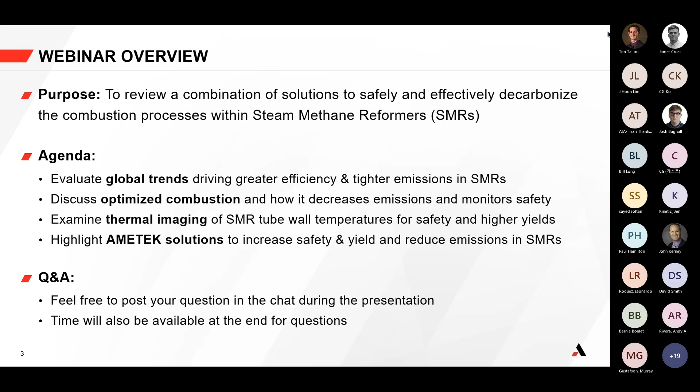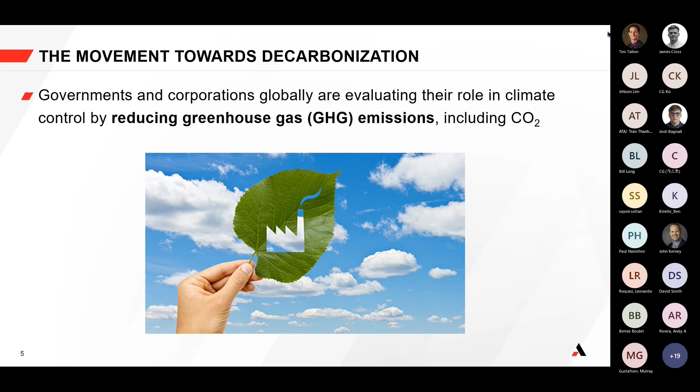So now just to get started, we'll talk about global trends. And I think the biggest thing about decarbonization is that there's a driving need in recognizing a need for climate control. So how can both governments and corporations do their part to reduce greenhouse gas emissions, reduce global warming, and in the process, how do we think about reducing carbon dioxide emissions? Now, many industries will continue to require the combustion process, because of its high energy density for power and for heat.

There are a number of industries, including steel, cement, and chemicals, that are relatively hard to decarbonize, as well as mobility solutions like ships, airplanes, air traffic, and automotive that will continue to require combustion for their high temperatures and high density per energy content.

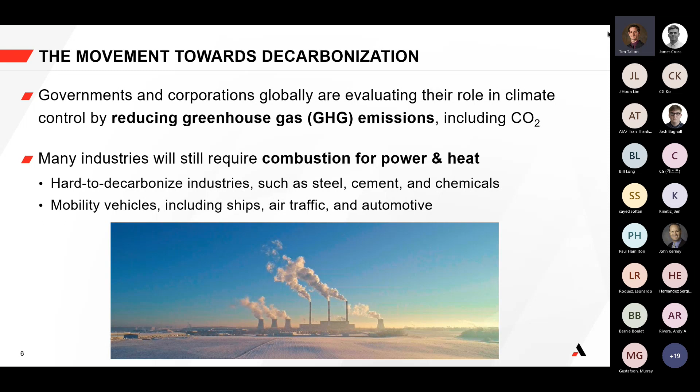So as we look to large scale decarbonization across the variety of combustion mechanisms and processes out there, some that come to mind are carbon capture to directly remove CO2 emissions from combustion, both before and after the process. There's also electrification to generate heat in place of combustion, and using high hydrogen fuels or hydrogen as a fuel to generate heat without creating any CO2 emissions. That said, combustion remains important in our movement towards decarbonization, and that's partly why we're here to talk.

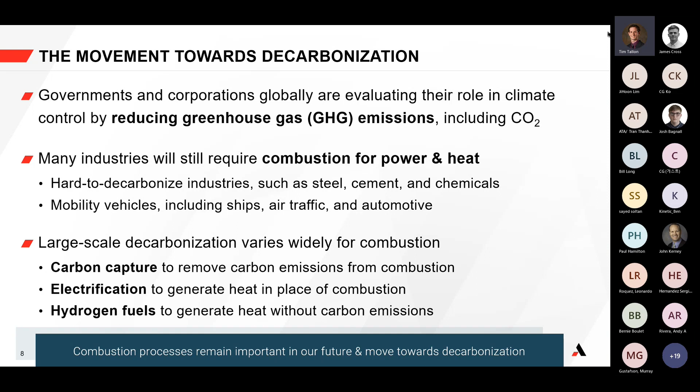I'll pass it over to James to speak more about decarbonization on SMRs.

Thanks, Tim. So zooming out a bit, talking about the transition from grey to green - it's a discussion we've had extensively within AMETEK. The end goal is clearly to get to the green space in hydrogen production as more hydrogen is produced for mobility applications especially. But in the interim, there's a huge demand from industry for hydrogen, and that's where we see the 20 to 30 year need for this blue phase of hydrogen.

That's switching from the current grey phase, where dominantly SMRs are used without carbon capture and storage, to a point where CO2 is captured from the SMRs so we can reduce the total carbon intensity of the process. The industries we tend to work in are fertilizer, methanol production, and refinery supply of hydrogen for processes like hydrotreating and cracking. We see a huge transition to blue hydrogen, with many new projects employing autothermal reforming with carbon capture and steam methane reforming with carbon capture.

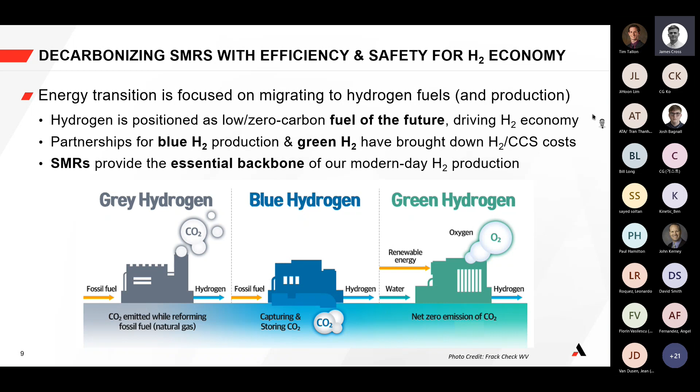So the energy transition generally is focused on migrating to hydrogen fuels. We'll talk a bit longer term about how hydrogen firing is affecting steam methane reforming, but we're generally talking about natural gas fired burners and combustion processes today.

There'll be a lot of partnerships for blue hydrogen production. Green hydrogen production costs are coming down longer term, but what we're really talking about today is the existing assets - the focus on efficiency, flexibility, and safety of those assets, and what you can do to reduce the oxygen set point levels in those furnaces without risking safety.

There's reduced flaring at a lot of plants, meaning previous waste gases are being redirected to headers, so more flexibility is needed on a lot of fired heaters now. Carbon capture is obviously a longer term emissions reduction strategy, so efficiency gains is where we're really focusing. That's what's in your current control, and what we can influence in the real short term.

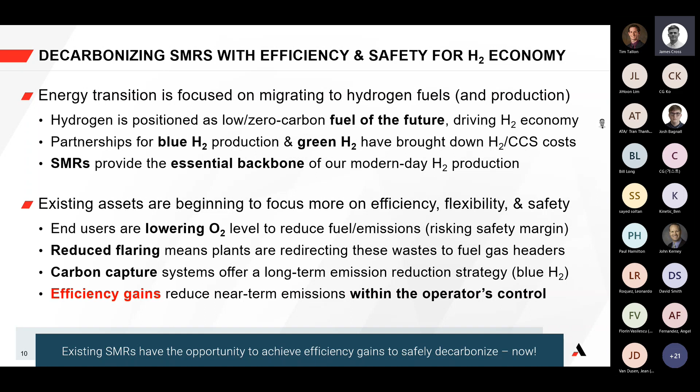Thank you, James. Really, as we move towards the hydrogen economy and increasing demand for hydrogen as a fuel source globally, the Steam Methane Reformer is the backbone of the present industry and installed base. The biggest thing, as you said James, is how can we think about efficiency right now to further reduce emissions within the operator's control?

And James, I know that you have some insight, especially on the different configurations that you wanted to comment on.

Yeah, sure. So I think over the years we've developed quite a lot of experience on all the various types. I'll talk about the licensing names, they're not secret to anybody. So there's a lot of Haldor-Topsoe side-fired furnaces out there. There's a lot of Foster Wheeler terrace-fired, multiple licensors of top-fired designs, KBR, Uhde, and obviously a huge number of bottom-fired, so vertical cylindrical heaters out there.

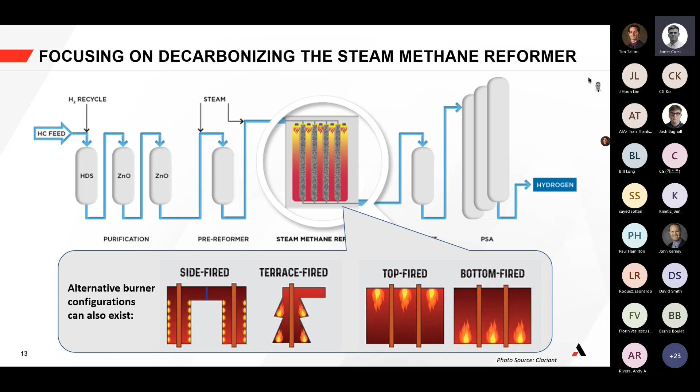So when we talk about combustion and tube wall temperatures, we're really talking about all of the different designs of steam methane reformer. They've all got their own little quirks, their own specific considerations, but we're talking quite generally today about the impact of changes in combustion.

and how that, from my side, affects the tube wall temperatures. Thank you, James. And so as we do a deep dive, we're going to focus specifically on the steam methane reformer.

There's really two principles that I want to highlight in this specific presentation. The first one is combustion optimization, and we'll go through what it is in just a moment, and then also tube wall temperature monitoring and how both of these combined apply to safety and efficiency of the steam methane reforming process.

Now, if we look specifically at combustion optimization, combustion by itself, just as a quick overview, requires three things. The fire triangle says we need oxygen, fuel, and heat in order to make a flame.

Now, because of inevitable circumstances of reality, poor mixing or malfunctioning burners or variable fuels, you're going to get some amount of incomplete combustion in the form of what we call combustibles. And at a very high simplistic level, combustibles are effectively carbon monoxide and hydrogen.

And so when we think about relevant combustion measurements, it really becomes what's the excess oxygen at the very end, exiting the furnace. We can use that as a combustion control set point. There's also combustibles, which we can monitor for safety and optimization. We'll get to that in a few later slides as well.

There's also methane. If there's any fuel leaks, you can detect leaks up front, and then sample flow, making sure that you have an accurate representation of the process. If you're going to be making combustion measurements, you should also make sure that you have an accurate representation of the process. So that's just at a quick high level.

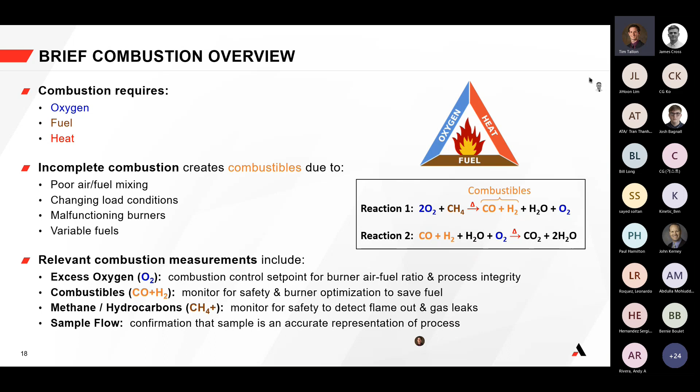But when we go a little bit closer and look at this combustion process, there's really different ways of operating. Now, stoichiometric is a fun long word, but really what it means is the exact one-to-one mixture of fuel and oxygen to produce exactly the exact amount of carbon dioxide and water, creating the maximum efficiency, maximum heat transfer with the least amount of heat loss.

Now notice in stoichiometric combustion that there is no excess of oxygen in perfect conditions. There's just no extra oxygen on the flue gas. If you did an excess oxygen measurement, you'd see 0 on the outlet.

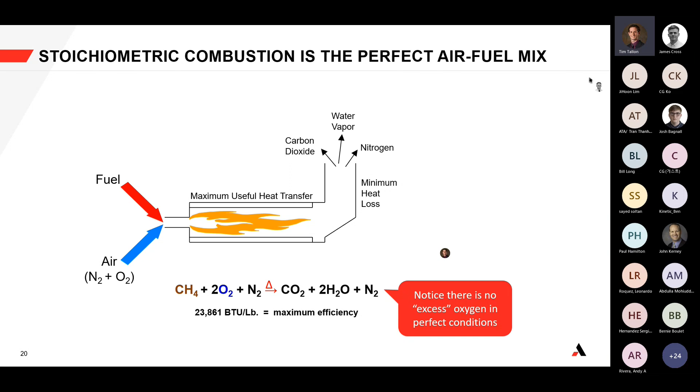Now, in the real world, we tend to operate a little bit excess oxygen in the flue gas, a little bit excess air at the burner. And that's typical, and what that allows you to do is it's a little bit less efficient, and it generates a little bit of carbon monoxide and hydrogen, low levels of combustibles, but it's safer because you don't have any risks of explosions, you don't have an unsafe condition.

Now, a potentially dangerous scenario would be a fuel-rich condition or an oxygen-deficient scenario where you don't have enough oxygen. You have too much fuel but not enough air at the burner. What happens is you operate much less efficiently. So it's very inefficient because you have a whole bunch of unburnt fuel going out the stack and partially oxidized fuel in the form of carbon monoxide and hydrogen.

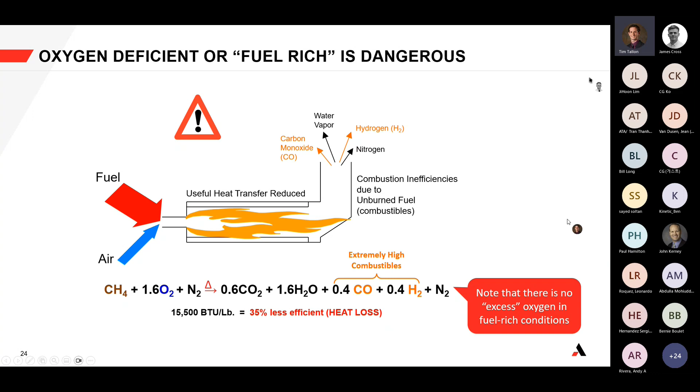So just from the standpoint of an excess oxygen measurement and combustion optimization, let's talk about that. When you look at natural gas, and this applies to a lot of different hydrocarbons like methane, there's a correlation between the excess oxygen in the flue gas at the stack, exiting and exhausting into atmosphere, versus the excess air at the burner - how much air you're directing at the burner. It's a pretty linear correlation.

The one thing I want to point out is if you look at 3% oxygen in the flue gas exiting the stack, that's roughly correlated to about 20% excess air at the burner. So 3% excess oxygen in the flue gas, roughly 20% excess air at the burner. You have some safety margin before you get to stoichiometric conditions.

Now the same is true for 2%. If you have 2% excess oxygen, you have about 12% excess air at the burner - less safety margin. But for illustrative purposes, for natural gas, generally operating between 2 and 3%, you have a correlated safety margin of about 12 to 20% excess air at the burner.

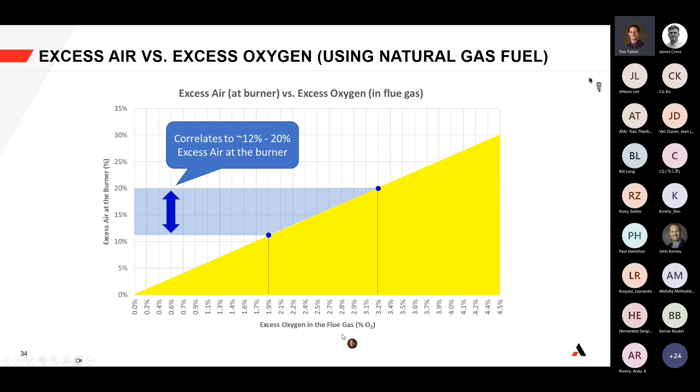So why do I point this out? Well, this is excess oxygen in the flue gas or excess oxygen in the stack measured by a combustion analyzer, and this is excess air at the burner. So I presented this slide on an excess oxygen scenario representing 20% excess air at the burner, which corresponds to an excess of 3% oxygen in the flue gas exiting the stack. I just wanted to make the correlation one-to-one apparent.

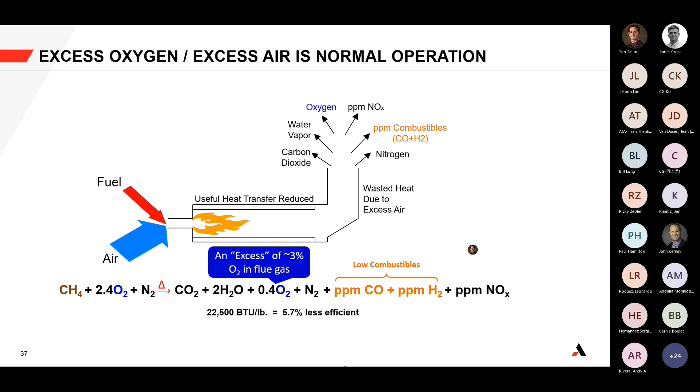Now, if you look at the efficiency losses of excess air, I already said that the typical operating set point might be 2% for natural gas, and that correlates roughly to about 12% excess air at the burner. James, is there anything you wanted to mention before I go any further?

No, I'm okay, Tim. I'll raise my points during the section on TWTs because I've got a few points about how this relates to increases in process temperature. Oh yeah, this is where it all comes together. So yeah, I appreciate you pointing that out. As we think about this, I'll mention the impact on tube wall temperature too. Yeah, I appreciate that, James.

So at a typical operating set point, for illustrative purposes, at about 2% excess oxygen, you have that about 12% excess air at the burner safety margin. And that 2% really represents some amount of carbon dioxide emissions and some amount of NOx emissions. Now, as you go higher to say closer to 3% excess oxygen, you're actually increasing your carbon dioxide emissions and your NOx emissions. Now, why is that?

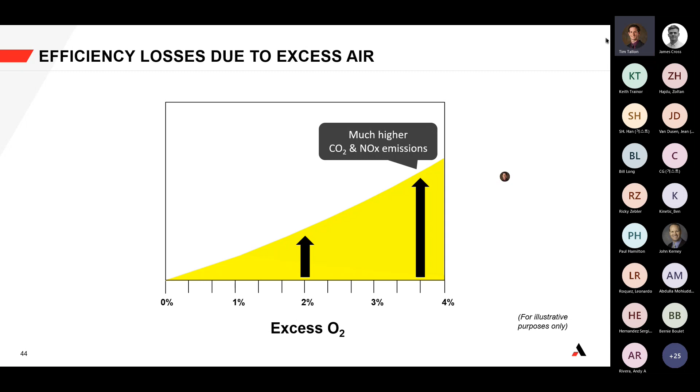Really, it's because there's a higher fuel consumption. You're burning more fuel at 3% excess oxygen, and that directly increases your carbon dioxide emissions, which also translates to more NOx emissions at the burner. And then if you go higher to say closer to 4%, you have even higher carbon dioxide emissions, even higher NOx emissions. So for all intents and purposes, this correlation also relates to the efficiency losses.

You become more and more inefficient as you increase your excess oxygen set point, and that's because higher emissions are driven from higher fuel consumption. So higher fuel consumption creates higher emissions - higher CO2 emissions, higher NOx emissions because of higher fuel usage. We'll just call this, for all intents and purposes, our excess air losses graph.

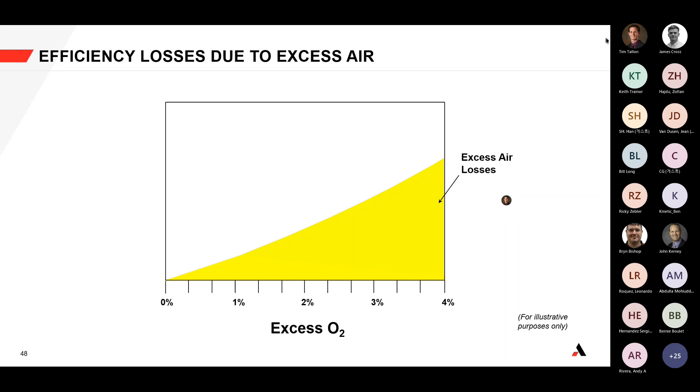Now, we don't want that, and so we want to monitor before that. But it becomes more and more inefficient as you increase your combustibles. Now, from that standpoint, let's look again at the excess air, and let's overlay the two.

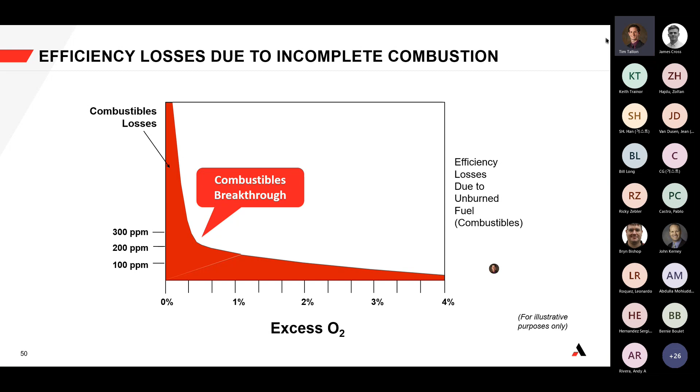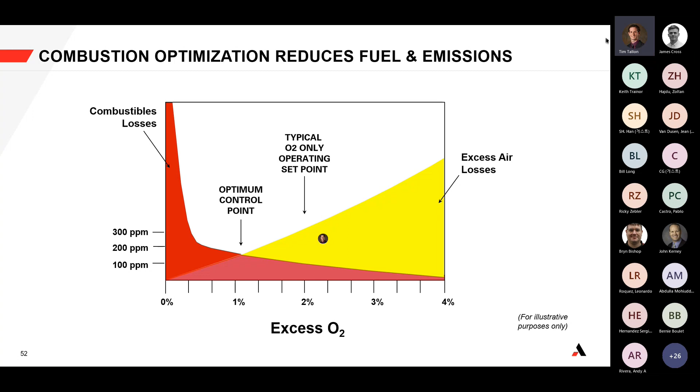We talked about the 2% being a typical operating set point. But when you measure both excess oxygen and combustibles together, you find that there's an optimum control set point. That optimum point has enough safety away from the combustibles breakthrough, but it's also less excess oxygen, which would increase your fuel consumption, your carbon dioxide emissions, your fuel usage. So ultimately, by measuring excess oxygen by itself, you have an operating set point. By measuring combustibles—again, carbon monoxide, hydrogen—you minimize your efficiency losses, and you have a mechanism for optimization.

That's what we call combustion optimization, and how it reduces fuel and emissions, for greater efficiency. So again, lower fuel consumption, reduced emissions, and also the added benefit of avoiding unsafe conditions by having that high combustible breakthrough point.

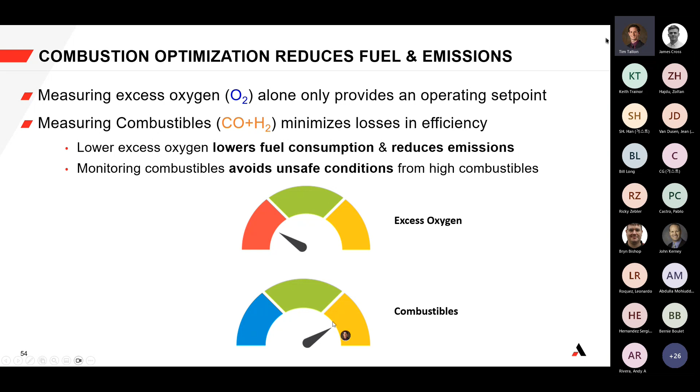Now, I mentioned that this was the first principle being combustion optimization. This is where, as you decrease your excess oxygen to closer to stoichiometric conditions, you want to monitor for your combustibles. But there is a green window in the middle.

Just as a quick highlight, the Thermox WDG-V combustion analyzer measures excess oxygen, combustibles, and hydrocarbons, including methane, ethane, and other hydrocarbons. I wanted to point this out because it supports the decarbonization of steam methane reformers by monitoring for optimized combustion, reducing fuel consumption through excess oxygen and combustibles measurements, also through safe monitoring of combustibles, as well as hydrocarbon measurements to monitor for fuel leaks.

It's also designed with enough redundancies and diagnostics for SIL safety systems. The excess oxygen was SIL 2 capable certified, and we recently got the RTD combustibles detector certified for SIL 2 as well—an added benefit for safety systems, interlocks, and safety instrumented functions. Beyond that, it also has the added benefit of providing fast responses for a close-coupled extractive design. You mount it right to the process flange, and that provides a way to have fast responses on the process.

That being said, it's certainly an AMETEK solution that I want to highlight to decarbonize steam methane reforming combustion processes.

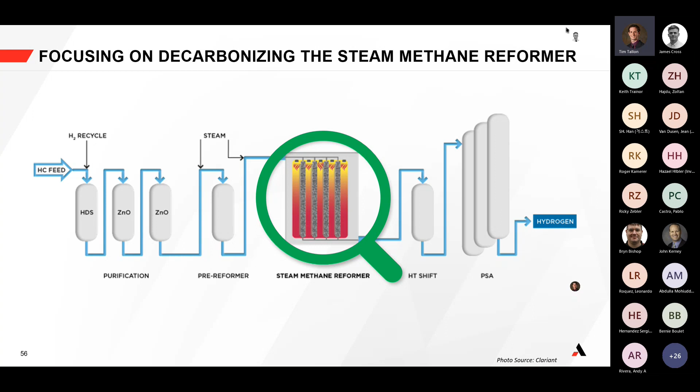All right, now that was basically focusing on—so again, we go back to the steam methane reforming process. As I mentioned, we talked about combustion optimization, but now let's talk about the tube wall temperature monitoring. So there is a correlation.

We did get one question just come in. Question is, if you were only to combust hydrogen as part of a decarbonization initiative, how would you test for a combustible atmosphere in the absence of a carbon molecule? Great, that's a great question.

I'll go back for one second, so—combustibles. Hydrogen is a fast-moving molecule, very reactive. If there was any unburnt hydrogen present because of poor mixing or even diffusion, even just buoyancy, you would be able to use a combustibles measurement to monitor for hydrogen. So to answer your question, you can still test for combustibles by monitoring with a combustibles measurement, because hydrogen is still visible. And also, I don't typically talk about it, but the hydrocarbons detector, the methane detector, can also be used to detect hydrogen because it's similarly reactive.

So how can you use it to test in the absence of a carbon molecule? You would have the ability to still use the combustibles detector for ppm level measurements of hydrogen, and then also the hydrocarbons detector for percent levels of hydrocarbon methane. But also, in the absence of a carbon molecule, you can use the hydrocarbons detector to monitor for high levels, percent levels, of hydrogen.

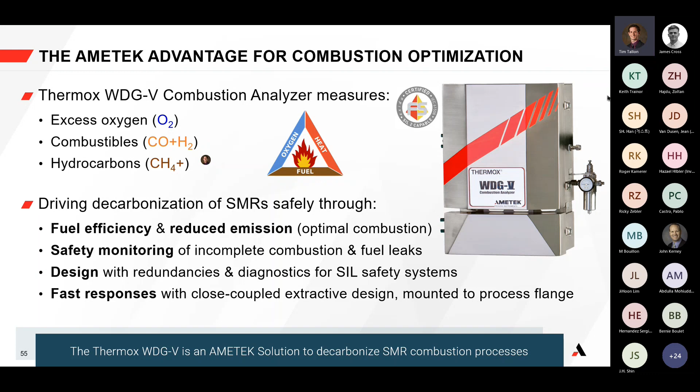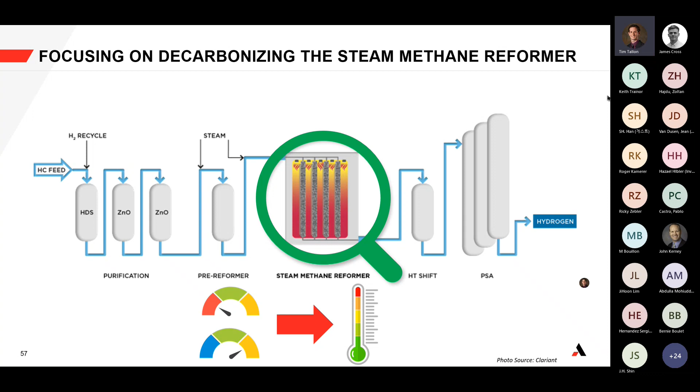Going back to what I was saying before, if we zoom out and talk about the Steam Methane Reformer, how does combustion optimization and tube wall temperature monitoring go hand in hand? That's really where these principles come together. We talked about how if you start using combustion optimization to reduce your excess oxygen levels, you start to increase your combustibles level.

Now that together provides you combustion optimization. You have two measurements that allow you to have efficiency, and also monitoring from combustibles breakthrough for safety. But what happens is as you leverage combustion optimization, you also have an immediate increase in the tube wall temperature. As you lower your excess oxygen, you're also burning hotter. And because you're burning hotter, you have to monitor for the integrity of your tubes and the tube walls to make sure that you don't have leaks, and also to make sure that you don't have hot spots or any of those items.

Anything else you want to share on that, James, before you do the deep dive on the connection between the two? No, I think that's the fundamental relationship, and it's born out of experience. As we see the excess oxygen levels go down, you do see more issues with highly local excess tube temperatures and hot bands where perhaps conditions have accelerated more quickly than they would have in the past.

Catalyst degradation or carbon formation on the inside of the tubes has happened maybe more quickly than it has in the past as the excess oxygen goes down. Because as you said, if you change nothing else and just go reduce your excess oxygen levels, your tube temperatures will increase.

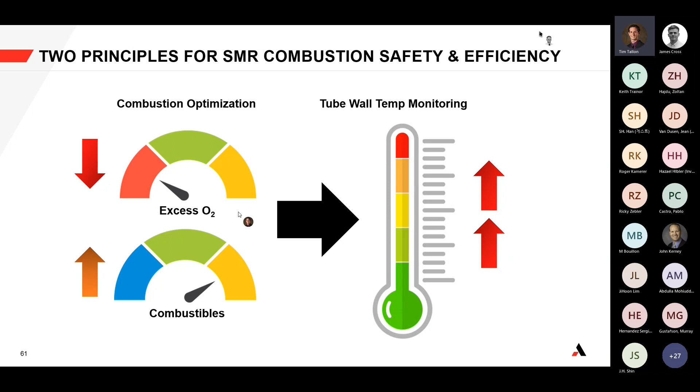So that being said, I'm going to pass it over to James to do a deep dive on tube wall temperature monitoring.

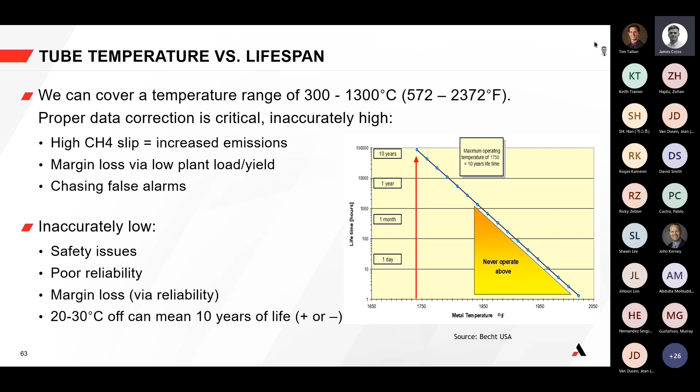Oh, I'll go back one slide. Could you just take that back one slide, Tim? There you go, thank you.

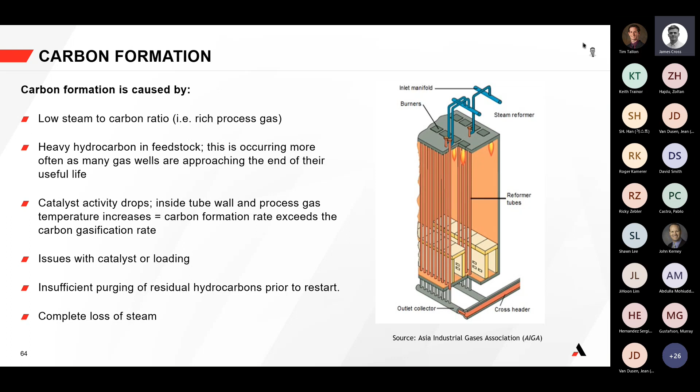One thing we see which shows itself as a temperature phenomenon is carbon formation on the inside of a tube. That's generally when you've got a low steam to carbon ratio, i.e. you're running a rich process gas with heavy hydrocarbon in your feedstock. That's occurring more often as many gas wells approach the end of their useful life. When you have that rich gas mixture, catalyst activity drops, so the inside tube wall and process gas temperature increases, and carbon formation exceeds the carbon gasification rate. So we get solid graphite essentially forming on the inside of that wall — a typical coking process. That could be caused by issues with the catalyst or loading, insufficient purging of residual hydrocarbons prior to restart, or complete loss of steam.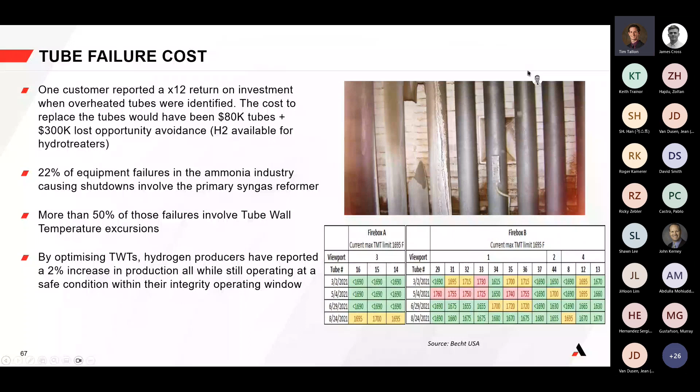So, I'm on a delay here. Sorry about that, we'll go back one. Back one. Okay, yeah, sorry about that. No, it's okay, there's a slight delay on my click.

One of the consequences of that is you get a runaway reaction whereby the heat transfer from that hot furnace atmosphere to the relatively colder process gas reduces. So you end up getting hot spots on the surface. The hotter that surface gets, the more likely the tube is to creep. The more creep, the more likely it is to rupture, and the more likely you are to get a leak.

The more likely you are to have a leak in one tube. Once that tube's nipped, that tube then becomes a radiant tube, which radiates heat onto adjacent tubes. So you can have a kind of runaway reaction that starts with a small local hotspot, but becomes a hot band, or a set of tubes that need to be nipped.

So what we typically do with customers is find ways to talk about the furnace balance. We look for areas in the furnace where temperatures or temperature limits have been exceeded.

One customer that we did this study with reported a 12 times return on investment, and this was with a partner of ours, Becht, who identified the cost to replace those tubes would have been $80,000, and then there was a $300,000 lost opportunity avoidance if that hydrogen would not have been available for the hydrotreaters.

We also work with the Ammonia Know-How Industry Association, and they identified 22% of equipment failures were caused by issues with the primary syngas reformer. More than 50% of those involved tube wall temperature excursions. So tube wall temperatures are, in a lot of ways, a canary in the coal mine. They're a very early warning of a potential issue somewhere in the combustion atmosphere or in the process reaction itself.

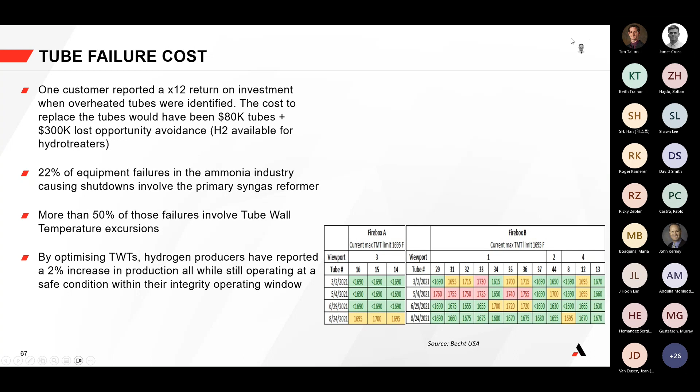That's an example of what happens when a tube does eventually fail. So what do we do at AMETEK Land?

The traditional method of measuring these tube wall temperatures is like you see in front of you, a handheld instrument operating at multiple wavelengths. Typically, these readings are gathered by hand. An operator will go around, write down the measurements, record those values, put those values into a spreadsheet which records a given background temperature, a given emissivity for that area of the furnace, and then a corrected value is ascertained.

There's a couple of concepts which are really important and which do impact the corrected value. One is the geometric view factor, which is the amount of radiation being measured by the pyrometer or by the thermal imager you're using, impacted by the geometry of the tube and by the section of the tube which you're measuring. So we need to consider how much of that radiation at the angle of measurement is making its way to the pyrometer, and how much is impacted by background radiation.

So background radiation is another really important consideration that we need to make. We don't necessarily apply the same background correction settings for all tubes in a reformer. If we do, and we make adjustments to the furnace on those values, what we might start to do is actively create cold areas in our furnace where we actually want to be creating very highly balanced areas.

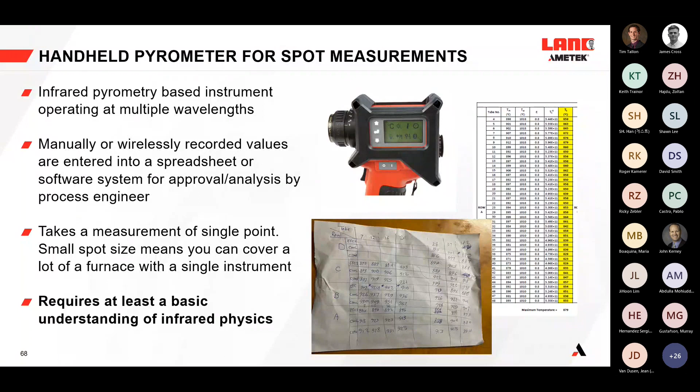One way we ensure that we're operating with this very high level of accuracy that we want, so we're really trying to make sure that we've got a very valuable reference measurement, is with the Gold Cup pyrometer.

The Gold Cup really eliminates the three things which we know cause a high level of uncertainty in the furnace atmosphere. The first thing is emissivity. We eliminate emissivity with this measurement by the enhancement effects that the gold hemispheric design gives you. We essentially create a shadow on the surface of that tube, and with the gold surface, enhance the emissivity via a number of reflections, and then transmit that signal back down to a pyrometer. So emissivity enhancement is achieved with the gold hemispheric design.

That shadow that we create on the tube also eliminates background radiation at the point of measurement. So that's the second variable that we eliminate. The third thing that we eliminate is the effect of sight path interference. In between the pyrometer and the tube, typically you have carbon monoxide, carbon dioxide, and water vapor, which actually do impact the readings somewhat.

We can rule out those interferences by the use of the Gold Cup, because it's essentially a 3 meter or 9 foot long water-cooled probe which we hold against the tube surface to get us that very accurate reference measurement. That's where accuracy comes in, and that's where, if we can be more accurate, we can make decisions on the running of the furnace which will enable us to increase the efficiency and essentially reduce the carbon intensity of the process.

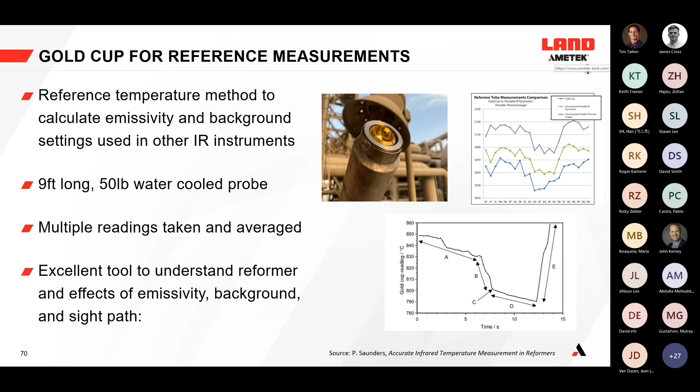I might ask you to progress the slide instead of clicking, Tim. I've got a huge delay when I click.

Another tool we use is the portable thermal imager for surveys and inspection. We've always had a range of fixed thermal imagers for collecting tube temperature information, but we added a portable instrument which gives you the ability to go out into the field and collect this huge amount of temperature data. We supply a small flow of cooling air to the instrument, up to 300 litres a minute in the very worst case scenario on a very hot furnace on a very hot day.

We developed that to be able to do surveys and inspections whilst keeping the benefit of the borescope. The borescope itself means we can put the camera electronics in a housing, but then put a series of relay lenses, and the actual lens itself, which is exposed to the furnace atmosphere, is on a 1 foot, 2 foot, or 3 foot borescope. So we can see right into the furnace process and get temperatures from a huge number of tubes with just a single imager.

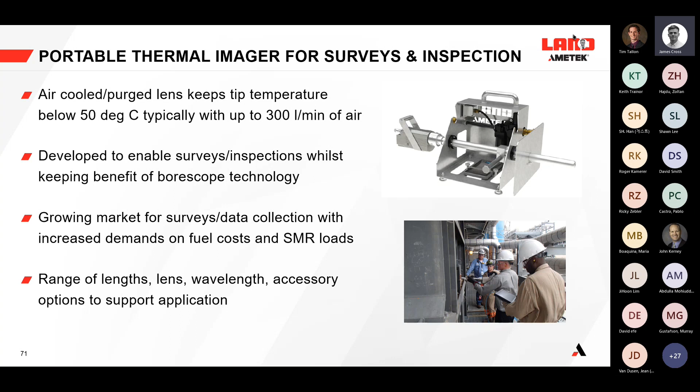These are the different implications of different lens options. Our biggest challenge on a steam methane reformer in many cases is the geometric view factor - the amount of tube visible to the camera. With a 90-degree lens, which you see on the right side, the resolution on tubes further away from the peep door actually goes down, so we have a limited number of pixels on tubes further from the camera.

If we have a 44-degree lens, the same view gives us more pixels. In many cases, we prefer a narrower lens, especially on these top-fired reformers with a huge number of tubes in a single row. A narrower lens gets you a smaller scene, but a larger pixel size in that scene, which means better resolution on the tubes further away from the camera.

With these images - and this is on a reformer with a very high hydrogen fuel content - we have very nice transmission through that furnace atmosphere. We can get temperatures from nearly any tube, even though there's a combustion atmosphere in between the camera and the tube. These high hydrogen fuel contents have very nice transmission, so we can get temperatures really nicely from a lot of data points.

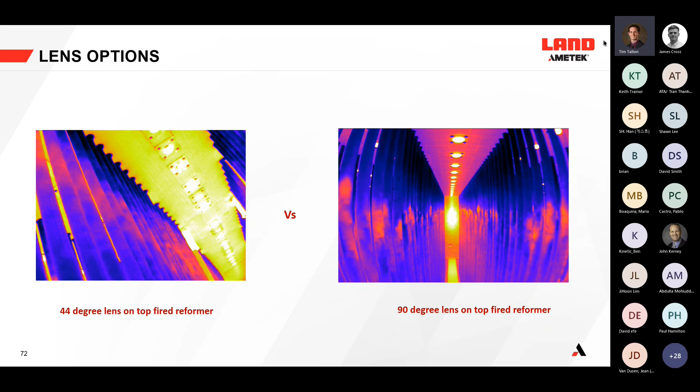The other thing I'll mention is that as you operate closer and closer to stoichiometric conditions, you're effectively starving the flame of some oxygen. The flame gets bigger - so you mentioned flame impingement. It's just fascinating to see how you can anticipate flame impingement and be really proactive on that. Just wanted to highlight that as well.

All right, I'll pass it back to you. Thanks, Tim. Yep, I'll hurry up - don't have so much time left, so I'll whiz through these slides.

Like we said, balancing is a really critical term here. We talked about accuracy, efficiency, optimization, uniformity, and balance. So this is how we balance.

Once we build these thermal gradients of reformers, we can get benchmark data and then start to make small adjustments to the furnace - nothing too soon or too sudden, but we can make small adjustments and increase the uniformity of those temperature measurements, and really have quite a significant impact on the yield.

One thing I've talked about recently with a licensor is, if we are increasing the yield, we're almost by definition increasing the efficiency, because even though we may be using the same or slightly more fuel, if we're producing more products, as a percentage of that production we're using less fuel to achieve that. So increasing the yield does have an effect on our efficiency, even if it doesn't necessarily affect our fuel pricing or spending.

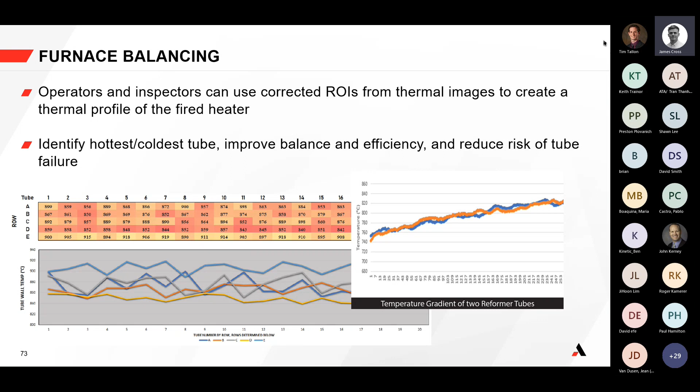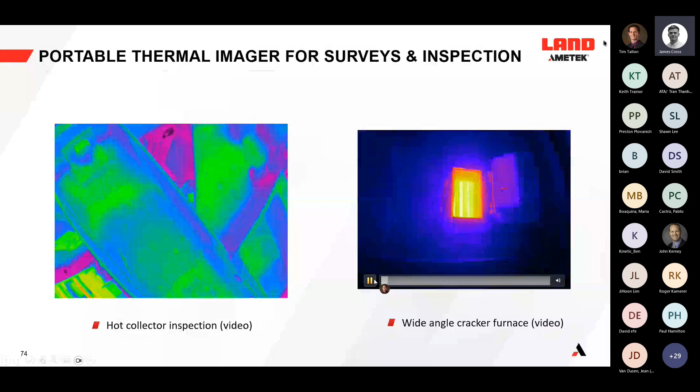We can look at collector temperatures using the borescope technology, even when it's a hot collector on the inside of a furnace. We can inspect those weld temperatures, inspect those subheader temperatures. And then on the right-hand side, it's not a steam methane reformer, but you can visualize it as a side-fired steam methane reformer if you like.

We can see a huge number of tubes with a single camera. So as opposed to taking single measurements and writing those down, you can put that camera in, take those measurements, and then go and do the analysis from the warmth or the cool of your control room or office.

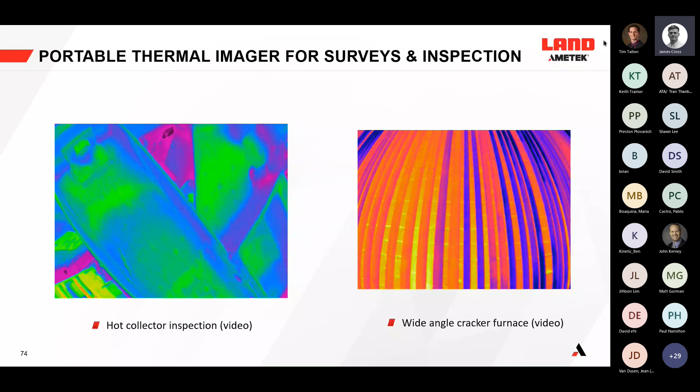Fixed thermal imaging - so we're using the same borescope that I talked about with the portable one, but this time we're fixing those cameras in the furnace. On the bottom right-hand side, you'll see how we do that: we weld a standpipe, we cut a small hole in the side of the furnace. I've got decent experience doing that, so it's not as scary to people as it might have once been. And then we essentially install the cameras in places that give us maximum coverage with the smallest number of cameras.

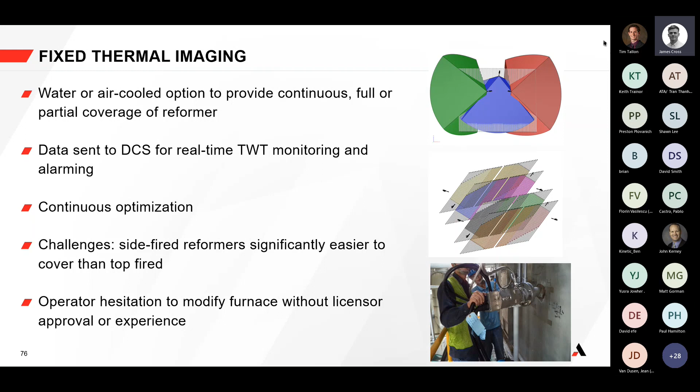Challenges are side-fired reformers typically need fewer cameras than top-fired. Top-fired, you can need, in some cases, 16 cameras to cover every single row with enough resolution. But we've got quite a bit of experience now in overcoming some of those challenges, and we've worked with most major licensors on that now.

This is kind of aspirational. We've got a piece of software called Image Pro Advanced Furnace Monitoring.

The next step I want to see happen is how the data is consumed by artificial intelligence and data scientists, and how this massive temperature data, billions of data points, is implemented in cloud-based pattern analysis, closed-loop control systems that licensors are starting to experiment with, and real-time correction of our models and simulations to spot differences between the ideal state and the state we're running in. Then we can do really smart things with burner control, tube lifetime predictions, catalyst lifetime predictions, and furnace run lengths.

So those are just a few of the things you can do with that temperature data. I've tried to bring a lot of this back to how we can work on yield, efficiency, accuracy, optimization, and balance. And I'll hand back over to Tim to finish the rest of the presentation.

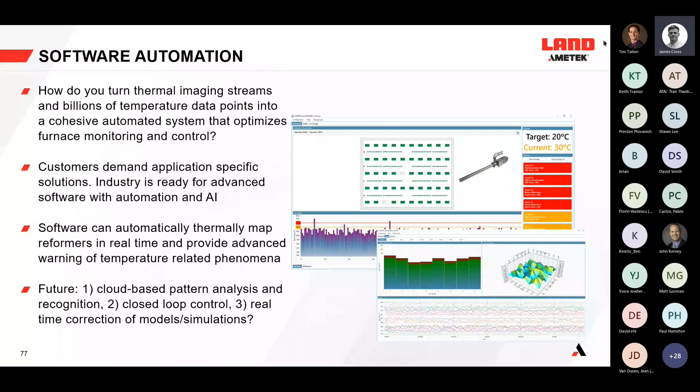All right, thanks James. I might call you back a couple more times, but the next couple slides are really just to talk about how we can help. We talked about a lot of important concepts when it comes to efficiency and safety, and I just wanted to give you a glimpse of some AMETEK solutions to consider that we've already talked about today.

As I mentioned in the beginning, the Thermox WDG-V combustion analyzer is one solution to give you an operating set point, but also to monitor for combustibles and for hydrocarbons and high hydrogen in one device. And as I said, it mounts directly to the process flange above the radiant section of the heater to make sure you get fast responses.

We have a lot of different configurations - it mounts to the process flange, and also can mount remotely as you see fit to support real-time combustion control and safety. You can leverage it for fuel efficiency and reduced emissions through combustion optimization. And we're SIL certified for excess oxygen and for the RTD detector combustible measurement.

So it's designed for SIL redundancies and proactive diagnostics for burner management systems that require some type of safety instrumented function and safety instrumented system.

I'll pass it over to James for the NIRB. Yeah, thanks Tim. So I talked about a lot of this technology - there's essentially the camera technology we use in either the portable or fixed borescope. We use near infrared borescopes, that's the NIRB, mid-wave infrared borescopes, that's the MWIRB. We have standard resolution imagers with hazardous area certification, high resolution thermal imagers without, but soon to have those hazardous area certifications. Then we can cover the whole temperature range.

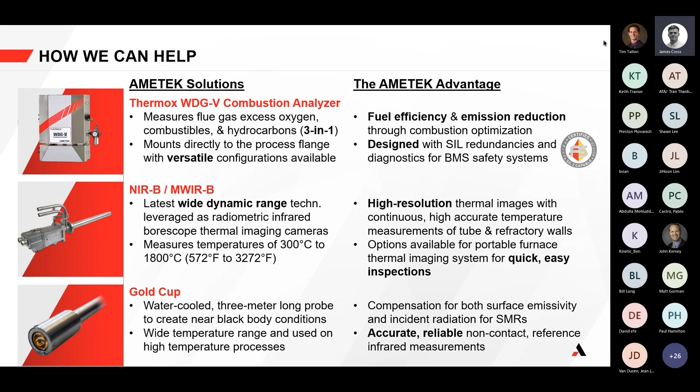Thank you, James. And then as we think through some takeaways we wanted to share, just kind of summarizing and putting it all in one place - some highlights when it comes to the steam methane reformer and the combustion process around that efficiency, we tend to think about the combustion optimization.

How do you lower the excess oxygen safely? In the process, lowering the excess oxygen reduces fuel consumption, which reduces carbon emissions. And by leveraging those multiple measurements, you can really tune in to have enough safety margin at the combustion air at the burner, but also optimize that air to fuel ratio.

And really it comes down to safety - monitoring for incomplete combustion, for fuel-rich conditions, and for loss of flame or flame-out conditions and fuel leaks. And on the steam methane reforming process side, James, if you want to take those two.

So, like I said, if we can balance the tube wall temperatures and decrease that spread of temperatures, we can increase feed efficiency and increase product yield. Less methane slip means less wasted gas, essentially.

We're monitoring for those increases in tube wall temperatures that affect our heat transfer coefficients. And then on the fuel leak side, on the safety side, we can monitor for leaks, hotspots. We can look through flames to look at burners, or we can look at the indirect effect of flames on the tube wall temperatures, refractory temperatures.

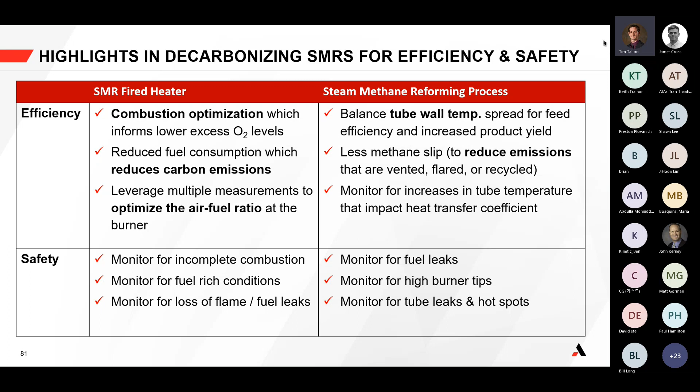So overall, I think we've got quite a number of things that we can do for both efficiency and safety, both inside and out. And really, it adds a very big picture of safety and efficiency to support a steam methane reformer. Hence this presentation.

I think when it comes down to other takeaways, as I mentioned, governments and corporations are reducing their greenhouse emissions, and that being said, combustion still remains important. So thinking through hydrogen, it's certainly going to be the fuel of the future, a low emission fuel of the future, and steam methane reformers are the essential backbone for driving us towards that hydrogen economy.

Combustion optimization, again, through lowering excess oxygen levels to reduce fuel and reduce carbon dioxide emissions while monitoring for safety. As James mentioned, really accurate thermal imaging of tube wall temperatures ensures no hotspots, potential rupture points, and ensures uptime and safety. A combined understanding of gas analysis and tube wall temperature data can really improve the balance and efficiency in combustion safety.

So anything you want to add to that, James? No, I think that's it, Tim.

Just wanted to thank you really for obviously the opportunity to co-present and the work that you've done to kind of connect these dots, as we say, to make sure our end users understand how they can get the value from both systems working together.

I appreciate your support too, and I think it's a big message, something that we can really think about for safety. So I appreciate your support on that, James.

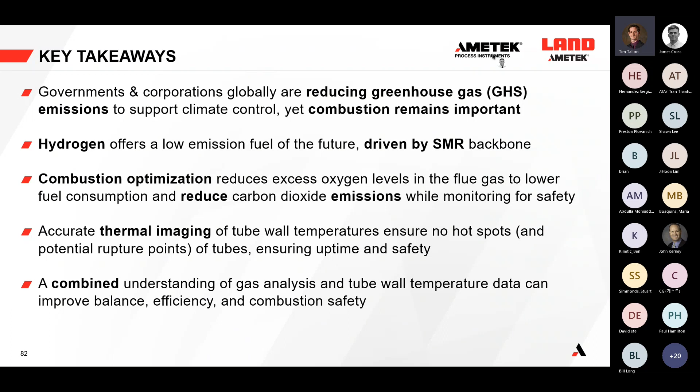I get one question quite a bit, Tim, which is how does hydrogen firing affect the thermal imaging? It actually makes it even easier for us, because those steam methane reformers that already use a high hydrogen fuel content have given us an insight into that. So the spectral response of the furnace does change, but it actually makes the temperature readings even slightly more accurate.

Yeah, and also just on the combustion side of things, even hydrogen firing for the combustion analyzer, it's more reactive. We can actually detect it even faster as well, because of its high sensitivity.